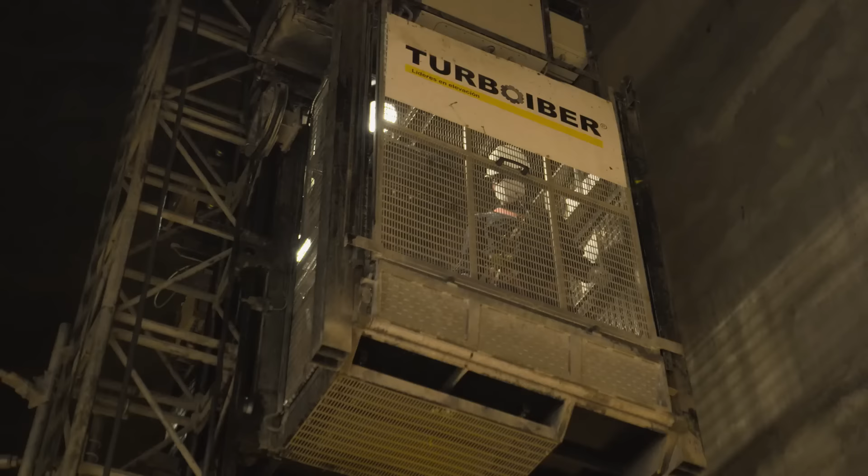Here we are on top of the tower, 220 meters up, and here you see all the solar field with 10,600 mirrors, which aim the light of the sun to the top of the receiver, increasing the temperature to 560 degrees Celsius.

A global industrial revolution is underway. We have a technological challenge for our environment, for the well-being of the population of the planet, for civilization.

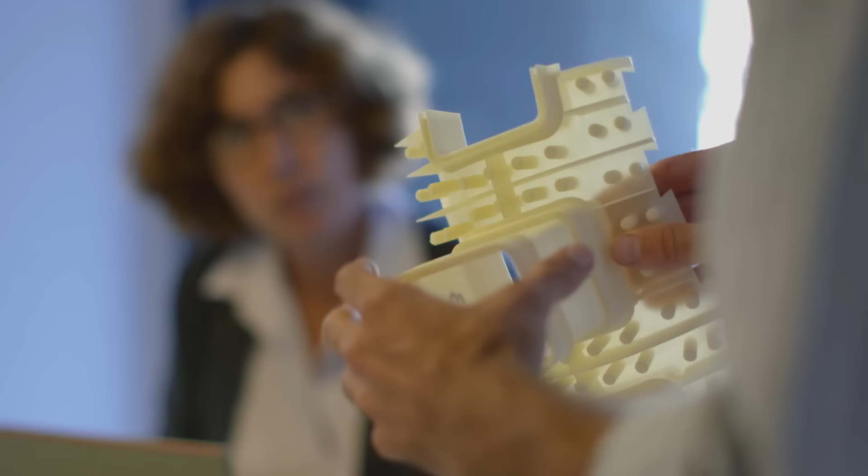Driven by passionate, dedicated individuals intent on shaping a new world. I do it because I look at my kids, and I honestly am convinced that this is the way.

A cleaner world. There is a way forward other than burning fossil fuels out of our funnels. A greener world. This wind farm is producing more hours of power into the grid than all wind farms in the UK, and probably in the world.

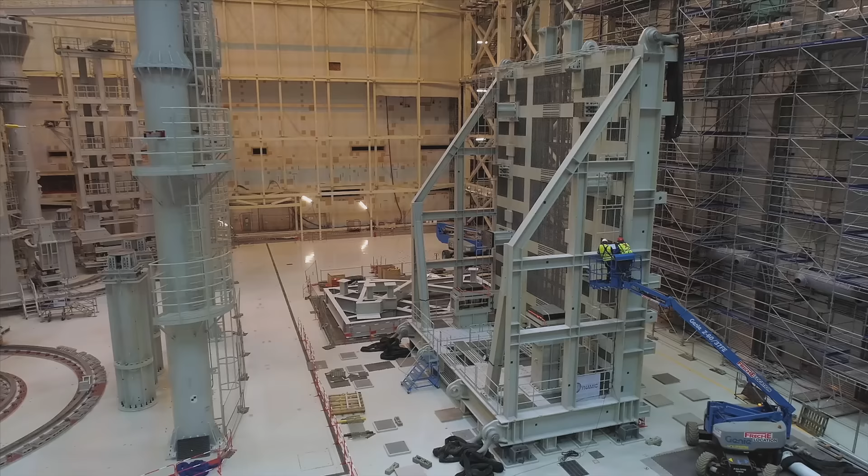What we've done in the past is not going to solve these challenges. We need to find new ways, and I think the only way to do that is to bravely step forward and implement technology. Together, they are pushing engineering to its limits to create extraordinary machines that can protect our planet for the future.

We face one of the greatest challenges in the history of humanity: to eliminate the fuels that have driven progress and technology for over a century, while our thirst for energy only grows.

Could the solution lie with an ancient and distant power source? It's without question that in our solar system, the sun is the greatest source of energy, and the better we can take advantage of that, the better it is for us as a civilization.

It's like a nuclear reactor in the sky, and it provides endless power. If we can harvest just fractions of this, it can power all our consumption.

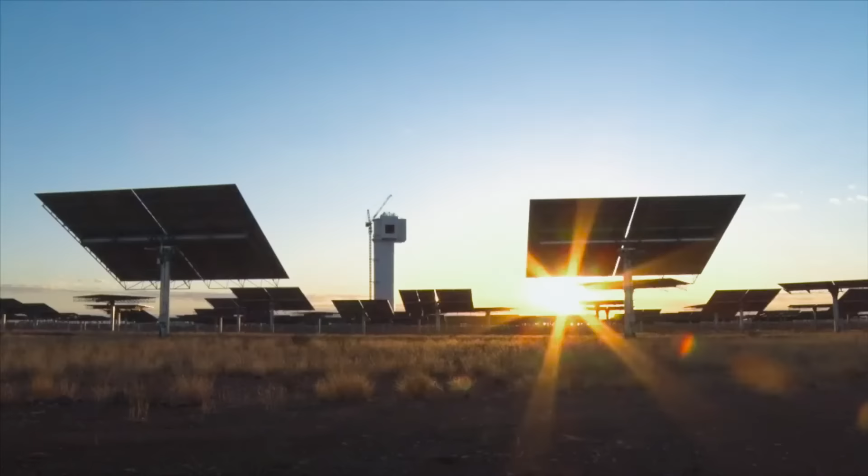Giant strides have been made in capturing the sun's energy, but to replace fossil fuels, solar power needs to step up a gear. We've got a long way to go.

The way I see it, we've only got 2% of the world's energy from solar. So there's a massive opportunity there, and this technology is made for it.

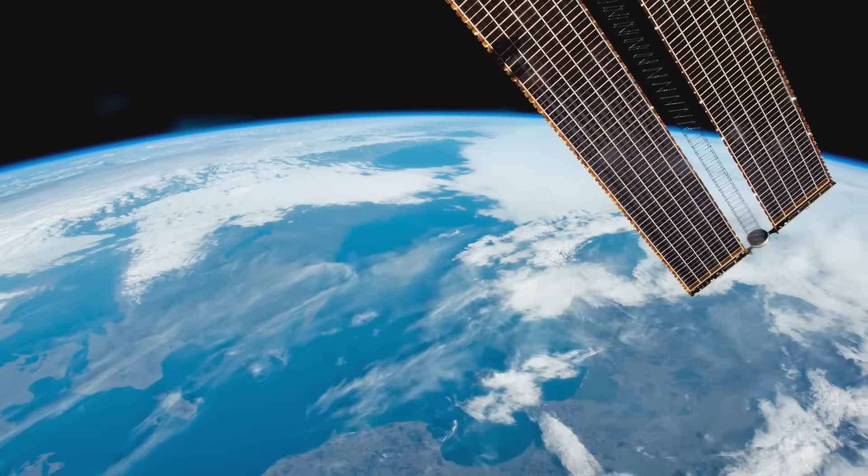Engineers are racing to capture more of the sun's power, to open vast new expanses for solar panels, and even to make solar electricity available through the night. This is the full cycle that allows us to keep generation going 24 hours using 100% renewable energy, the light from the sun.

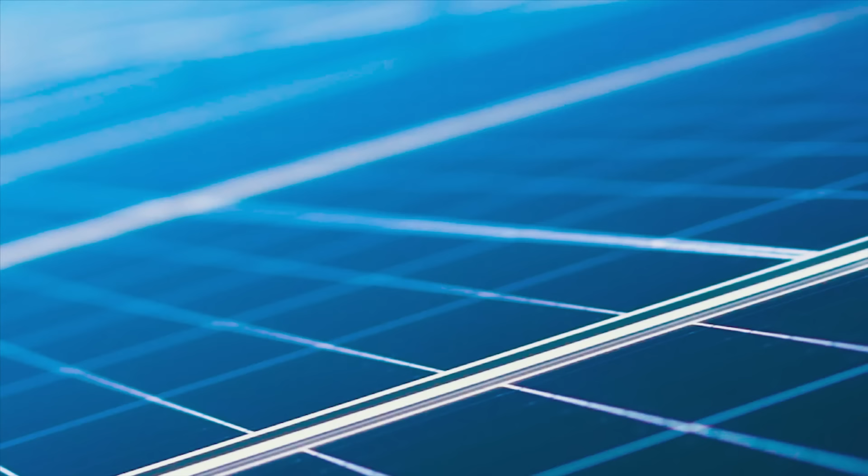The vast majority of solar power today is generated by silicon solar panels. These are made of many individual cells. Each cell has two thin layers of crystalline silicon, which have been altered so that one is slightly negatively charged while the other is positive.

The magic happens when light falls on it. Electrons in the silicon atoms absorb the energy and break free. The negatively charged electrons are then drawn towards the positive layer. Once connected to a circuit, this flow of electrons becomes electricity.

Solar panels like this are on rooftops all over the world, producing clean, green electricity to power our homes and charge our gadgets.

But transportation is a much tougher challenge. It's still overwhelmingly powered by fossil fuels.

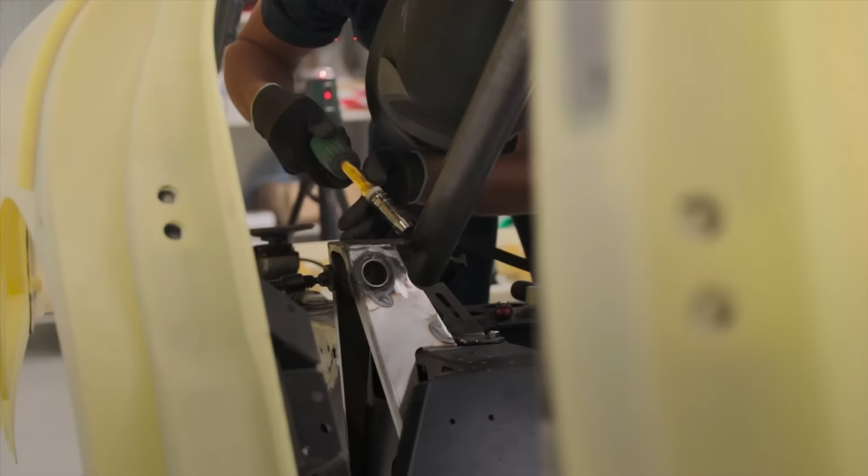A tech startup in Holland has gone right back to the drawing board, inventing a new car from first principles that could revolutionize personal travel. Their goal is to prevent billions of people buying gas-powered cars by offering them a vehicle that charges itself for free.

Everybody said we couldn't do it, and that's what makes it interesting. So I think that's actually one of the things that motivates us, that it seems like an impossible challenge. And if we look back at the beginning, it all started with the World Solar Challenge.

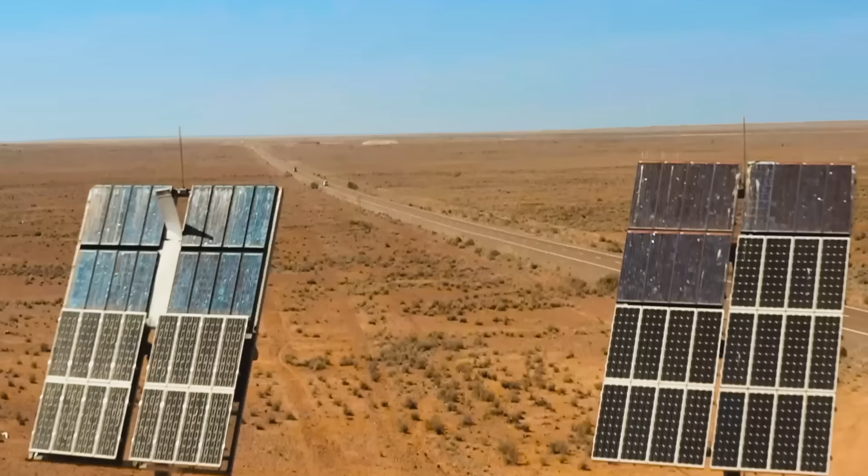Their story began at a race across Australia. Every two years, a fleet of futuristic vehicles can be seen streaking across the desert. This 1,800-mile race is powered by the sun, with cars built by students from around the world.

In 2012, a Dutch team from Eindhoven, including electrical engineering student Arjo van der Ham, decided to enter for the first time. I think most people were there for the adventure, for actually building something with your own hands during your studies, seeing it work, and then trying to win the race in Australia.

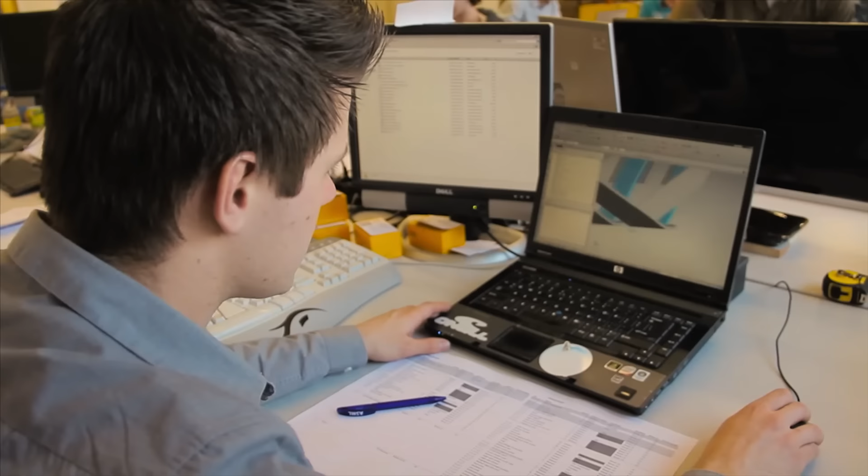In previous years, all entries had been one-seaters, built purely for speed. But that year, the team decided to enter a new category that awarded extra points for comfort and practicality. The idea was to encourage the development of a commercially viable solar-powered car.

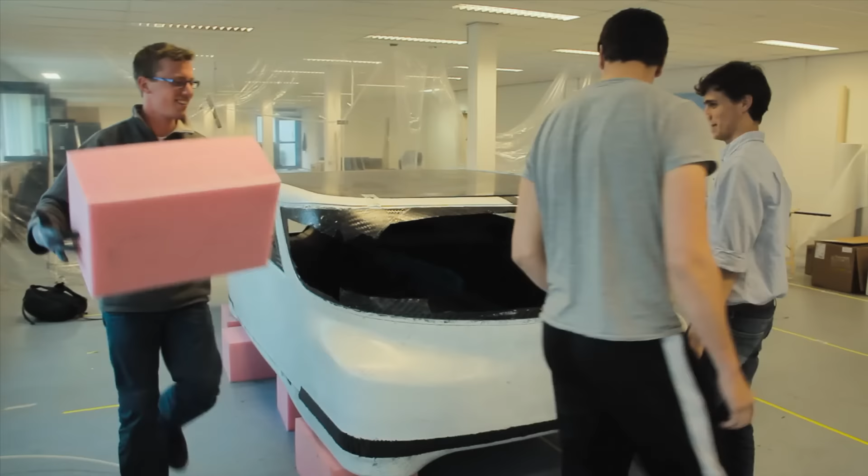We said, okay, let's build a four-seater car. And that became Stella, the world's first solar-powered family car. It had a flat roof, especially for the efficiency of the solar panels. Furthermore, it was very aerodynamic and very lightweight, made almost completely out of carbon fiber.

The team had just over a year to fully design and build a radical new solar car that could also be a practical family vehicle for everyday use. Stella, they hoped, would be the blueprint for the car of the future.

People would be sleeping at the university, waking up, building the solar car, going back to sleep for 6 hours, then waking up to build again. It was really an intense period for most of the people on the team.

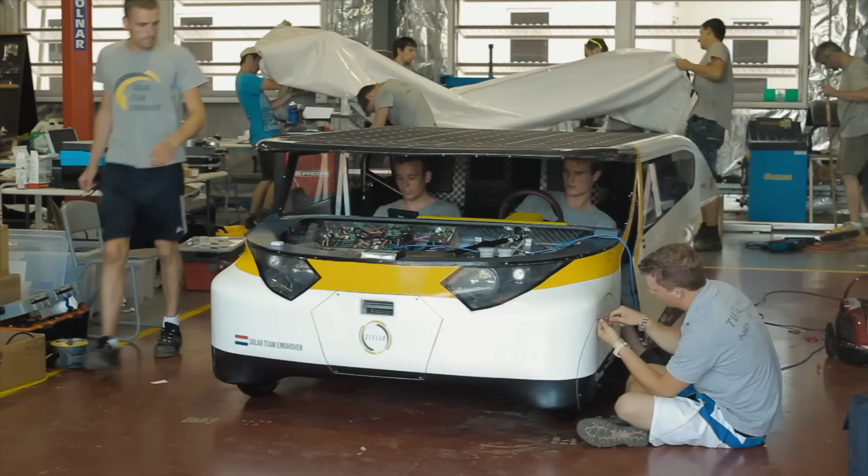On the 6th of October 2013, the only family-sized car in the race crossed the starting line in Darwin, Australia. For the next 6 days, Stella would be racing through the desert, powered by the sun.

During the race we had the solar car, and in front of that a small van called the strategy van, packed with computers. There were two of us, me and my buddy, modeling and calculating exactly how fast we should drive so that at the end of the day our battery would be exactly empty.

Everyone expected the comfortable four-seater to be much slower than the others. But by day 3, she'd hit 75 miles per hour, so fast the team bus couldn't keep up.

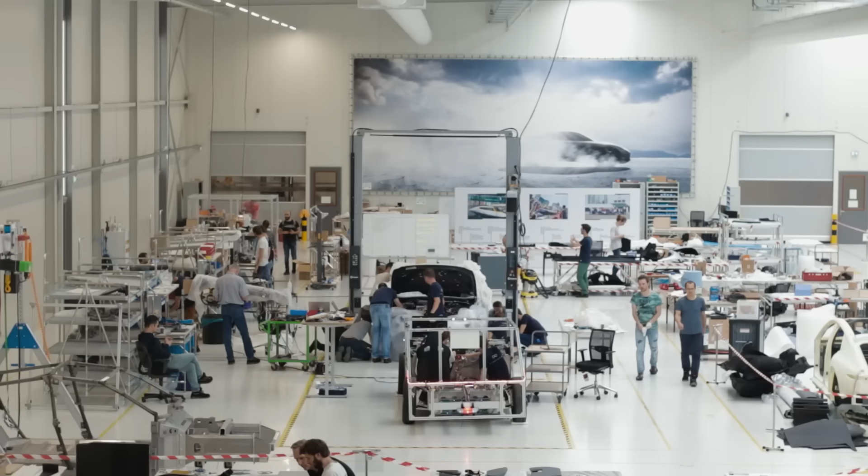Arjo and four other team members decided to make the dream a reality and launched Lightyear to make solar-powered cars for the public. In one year, the entire fleet of cars throughout the world will drive one light year worth of kilometers. The mission of the company is to get that to one light year of sustainable kilometers by 2035.

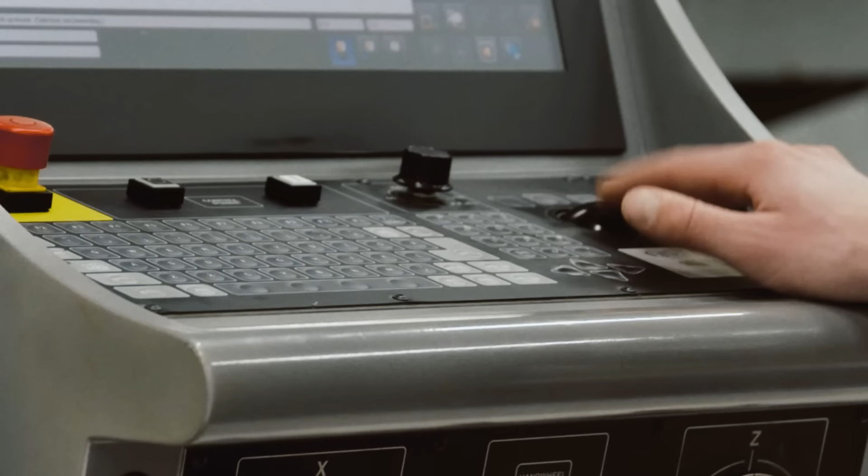To achieve their mission, they set about turning Stella's outlandish design into something more attractive to consumers, while still keeping the radical approach. We came up with our own scoring formula for what would make this car better. The key metric we optimized the Lightyear 1 for is the amount of miles you can drive each year on the sun - the miles you can drive for free. That guided all the decisions. So if you have to decide whether the car should be wider to accommodate more solar panels, or smaller to make it more aerodynamic, you calculate how many solar kilometers option one would give versus option two, and then make your decision. This is what guided the development of the Lightyear 1.

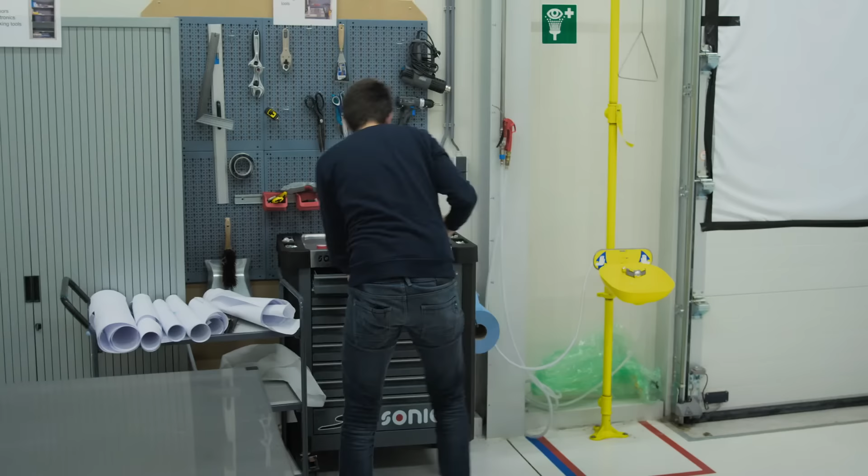As Chief Technical Officer, Arjo has overseen the design of the solar panels. At their workshop in the Netherlands, Lightyear are fixing them in place. With panels on the roof and the bonnet, they cover 54 square feet in total. But although they work in the same way as a standard panel, Arjo has altered the structure to maximize the power. A special technique can reveal the design.

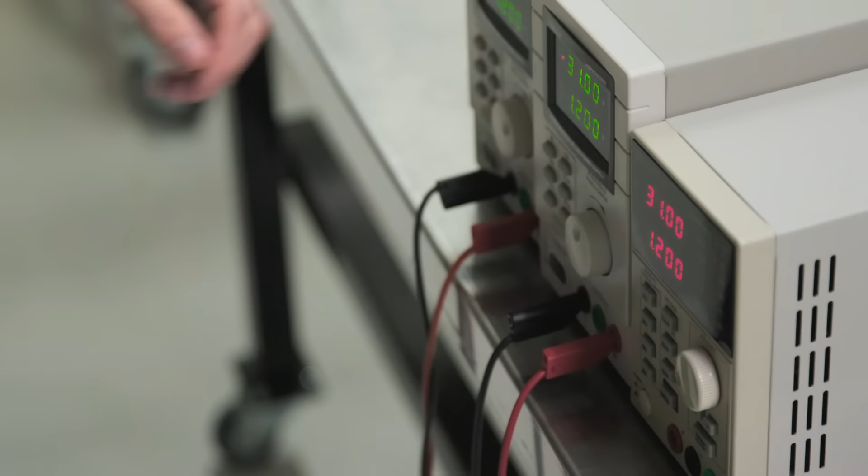We can actually show the structure of the panels and any defects they have using an EL test. With an EL test, you use the solar panel in reverse - normally the solar panel turns sunlight into electricity, but if you do it the other way around and provide electricity to the panel, it will work as a light source, lighting up in the infrared spectrum. Now we make it dark in the room, turn off the lights, and take a picture with a camera modified to show up the IR light. Then we can see the groups lighting up.

You see all of the cells lighting up, but there's a couple of exceptions. This is actually an old panel that we used already for a lot of tests and abused quite a bit, so those are also the places where the solar cells themselves don't work anymore.

Like an X-ray, as well as showing what's broken, the image reveals the inner structure. To increase the power output of the solar panel, we've done lots of small tricks, like putting all the solar cells pretty close to the edge. We've cut them to a smaller size, so we can place them closer together. Lightyear claim these are the most efficient solar panels on any car, with the improvements gaining them 20% more power.

As well as squeezing more solar cells into every square foot, Ayo has divided them into groups. To see the benefit of that, you need sunlight. Luckily for countries like Holland, the panels even work on a cloudy day.

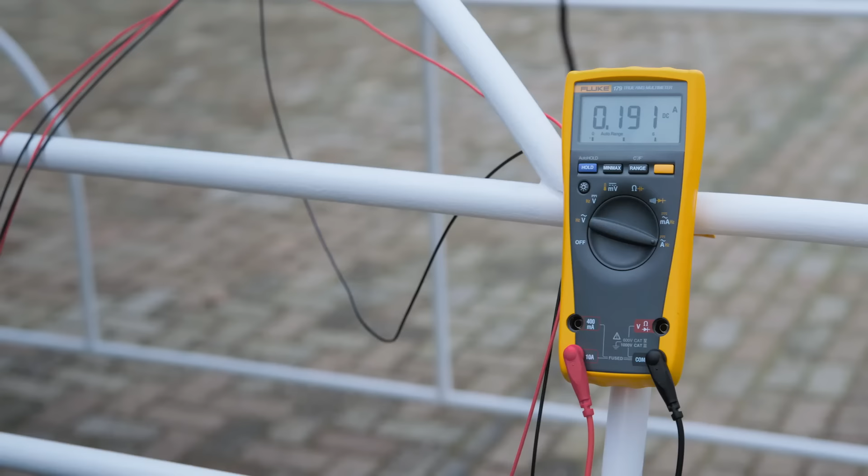First, Ayo connects this regular solar panel to a voltmeter. This will reveal what impact shadows can have on the power they produce. We've connected the panel to the meter, and if I put a shadow on it, you'll see this number dropping - and it doesn't matter where I put the shadow, you lose the same amount of energy. If a shadow falls on even one solar cell, the power generated by every other cell drops by the same amount, even if they're in sunlight, because they're all connected.

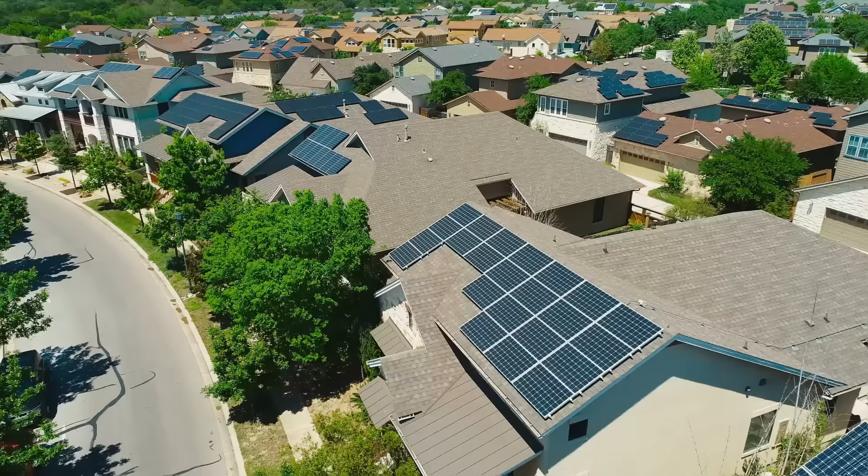So the whole panel becomes much less efficient. This doesn't matter much for panels on rooftops that rarely have shadows fall on them, but cars regularly drive under trees or past buildings. On this panel, we've actually divided it into 11 very small panels. These 11 small panels mean that if one of them is in the shade, it will only shut down that one small group and not the entire panel.

We can actually demonstrate this. If I go over it with this board, I create a shadow on the front, and only the first meter shows that it drops - the other meters still show the same value. If I move it along, the value on the first meter comes back, and it drops on the second meter. Moving further along, the same thing happens on the third meter. So as I go over the different groups, I only shut down the performance of that group, not the entire roof, which you would see on a regular panel.

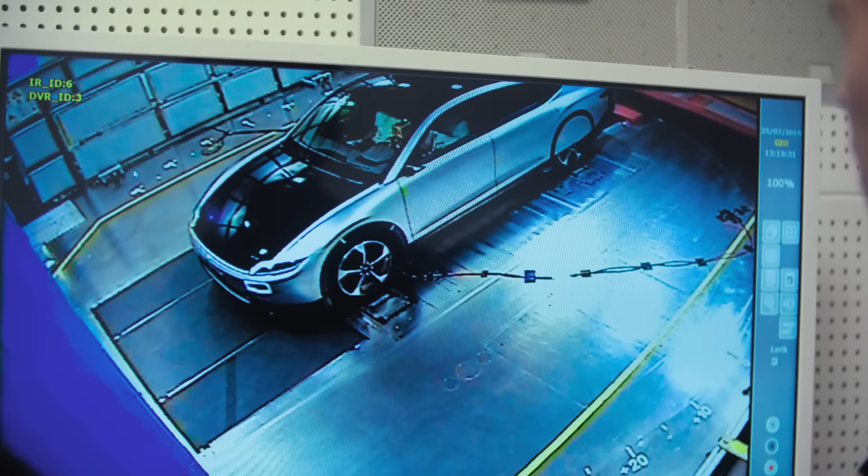As if reinventing the solar panel wasn't enough, the Lightyear team have an even bigger engineering goal: making the car one of the most efficient ever produced. The Lightyear 1 is designed to maximize the amount of miles you can drive each year on the sun. And if you break that down, the biggest factor is aerodynamics, so making the car more aerodynamic is where you can save the most on energy consumption.

Most of the design process happens using computer simulations. But now the team must prove how streamlined the car really is.

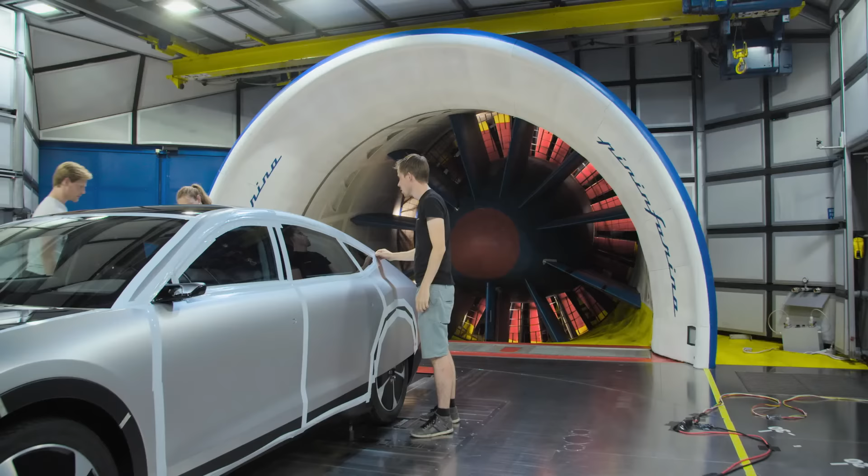Annemiek Koers is responsible for Lightyear 1's aerodynamics. We are currently in the wind tunnel with the prototype of Lightyear 1 to test how it performs at different speeds. So we test the airflow over the car, how much drag it produces, and what effect that has on the range of the car.

The tests will reveal the drag coefficient, a number that tells you how much wind resistance the car has. The target is to get down to about 0.2, which would equal the most streamlined production car ever made. With such low drag, it could drive much further with the precious solar energy it collects.

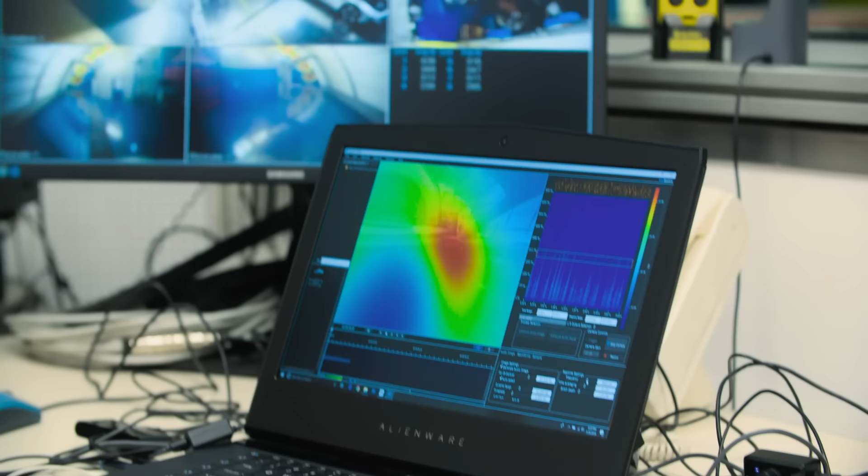But compared to a regular car, the team face an extra challenge. As well as being streamlined, the shape must also fit enough panels. The aerodynamics are a bit constrained by the solar roof. It needs to be quite a flat surface on top instead of having very curved surfaces, which would be better for aerodynamics. But the team have managed to find a profile that boosts both solar power and efficiency.

One that gives a larger area for the panels while also reducing drag. You can see we have a very shallow slope going to the rear, and the flow can stay attached over that full length. If you have a shorter car, you get a steeper slope, and that will detach the flow and create a lot of drag.

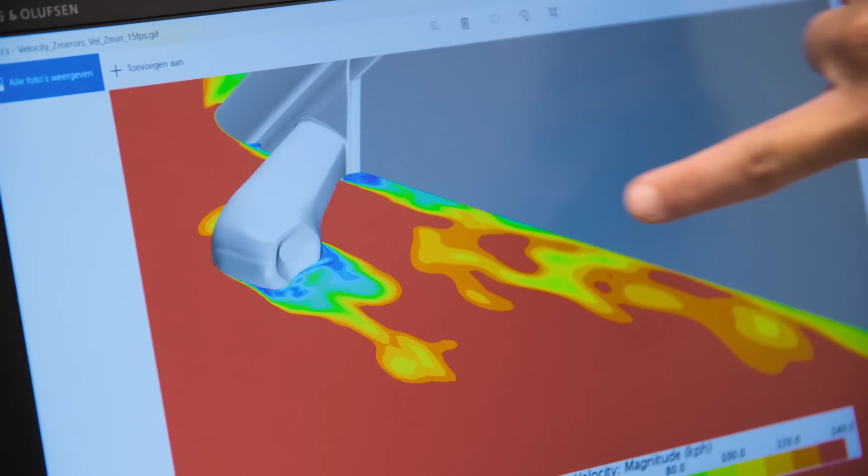The team analyzed and modified every inch of the car, replacing bulky wing mirrors with streamlined cameras and fixing covers over the back wheels.

Eventually, the team get the drag coefficient down even further than they'd hoped, below 0.2. So we can claim to be the most efficient production car by the time we get to production, but that's of course the first step.

This world-beating efficiency means the solar energy can go much further, even in cool, cloudy countries. The solar panel will actually give you enough energy to drive somewhere around 8,000 kilometers per year in the Netherlands. It doesn't sound like that much, right? But the average car in the Netherlands actually drives only 11,000.

For California, they drive much more, but there's also much more sunlight, so you get again around 70% of your annual energy need from the solar panel. For the other 30%, the Lightyear 1 can be plugged in and charged like a regular electric car.

For now, to pre-order one will set you back well over $100,000. But it could also save thousands at the pump. Towards the future, we will be developing an affordable version of the Lightyear 1, and we see energy efficiency as the key to the price in the longer term.

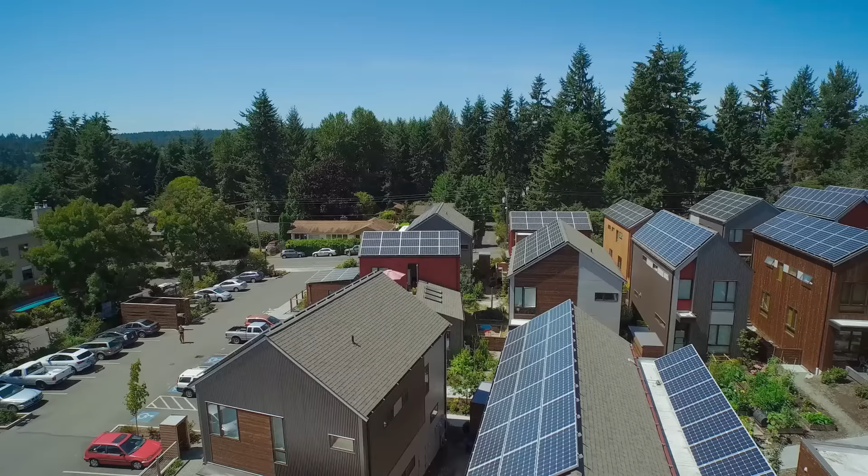But while solar cars may still have a premium price tag, the cost of standard solar panels has already plummeted. The main mineral used to make solar panels, quartz, is abundant and cheap. And by mass manufacturing in large factories with automated production lines, they also cost less to make.

Solar power now is the most affordable source of power. It's just a matter of capturing this energy. Solar power now beats coal-fired power and diesel generators, and hundreds of millions of solar panels are manufactured every year.

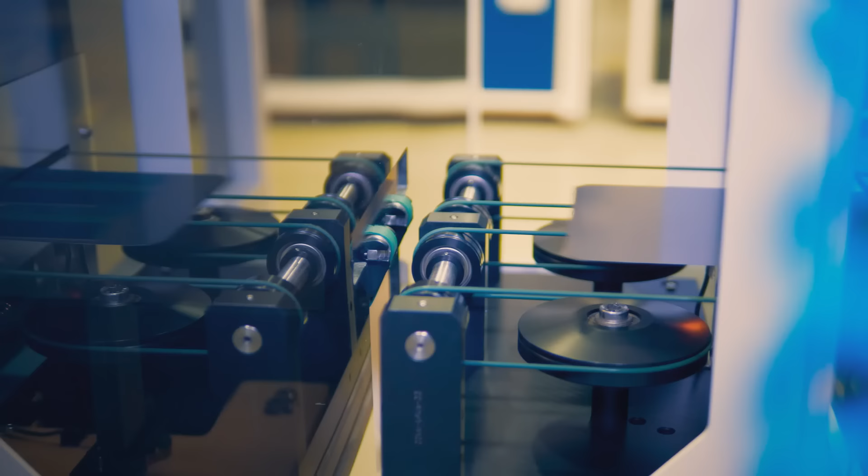With such cheap panels available, solar farms have mushroomed. Many are so large they're visible from space. Some generate over 2 gigawatts of electricity, enough to charge 400 million phones at the same time. And yet solar power still produces only 2% of the world's electricity.

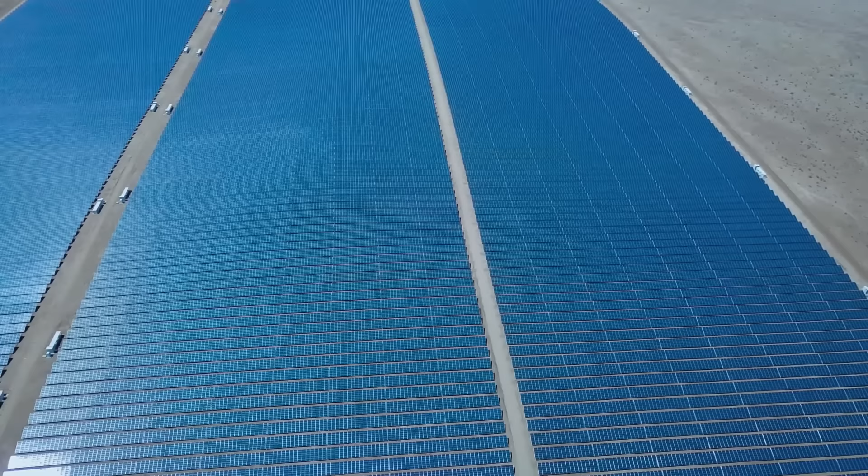That's because although panels are cheap, they need the right kind of location. So one of the challenges, and this is now starting to happen with the very high number of solar panels, is we are searching for new places to put them. And it's a quest to find these areas in good positions.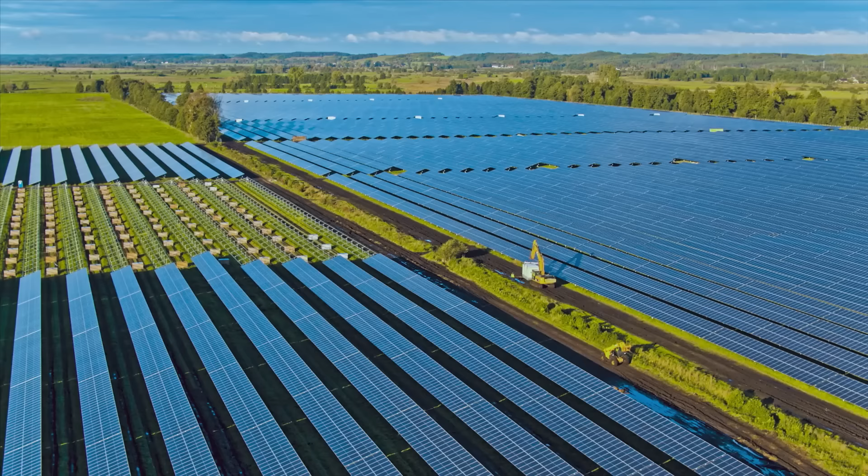As solar farms get bigger, they start to compete with other uses for the land, such as recreation, farming, forests, and other wildlife habitats. It's questionable whether to set aside big surfaces for solar farms, and it's becoming more and more difficult to find good spots for at least very large solar plants.

To solve this conundrum, an entirely different approach is starting to make waves. Børge Bjørneklett is the founder of Ocean Sun, a company making platforms for solar panels that float. Børge realized that there are water bodies all over the world with readily available sunlit surfaces.

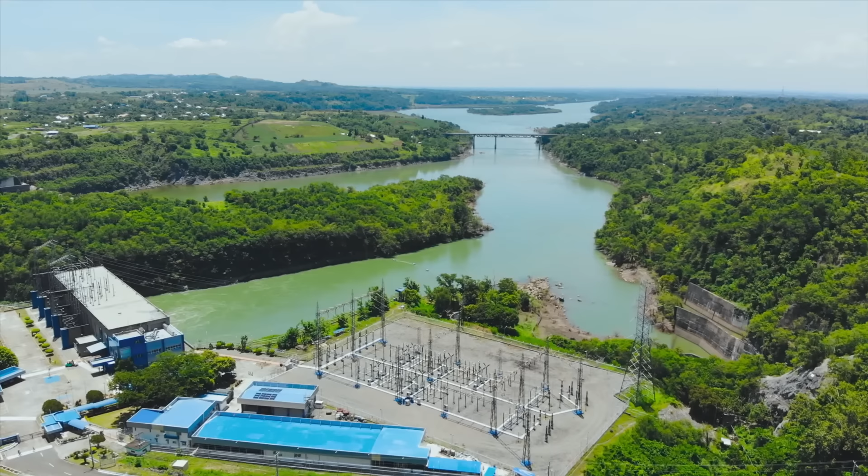Many, like the Magat Reservoir in the Philippines, are next to hydropower dams, which has a big benefit. One very nice thing about combining floating solar power and hydroelectric power is the very short distance from producing solar power to delivering it out to the grid, because the infrastructure is already in place at the power station.

The solar panels generate electricity when it's sunny, while the dam makes power when it rains. It has the flexibility over the seasons—for the rainy season and the dry seasons, you can make a more steady power production. So this combination is a fantastic application.

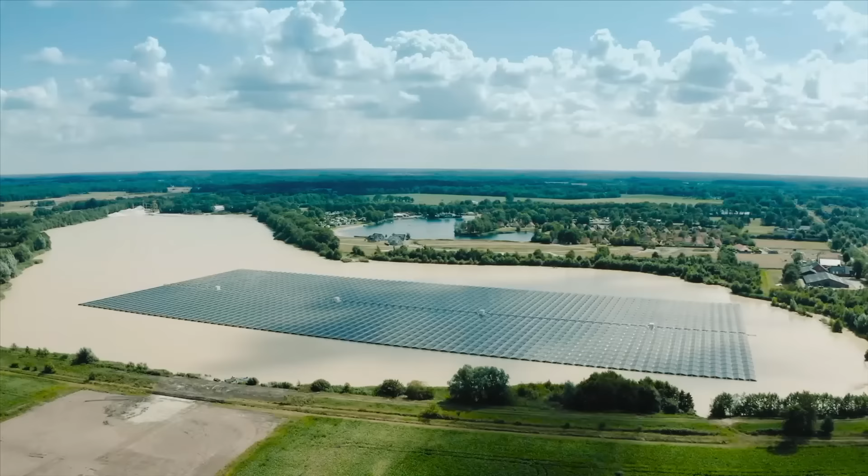Other companies are also targeting lakes and reservoirs. But Børge has set his sights on a much bigger body of water: the sea.

The main obstacle is the ocean waves. The challenge is very much to create a protective environment for these solar panels, and also to cope with waves and strong winds that can occur on water surfaces. Ocean Sun tested their design off Norway's coast.

The most critical piece of engineering that protects the panels is also the simplest: the thin polyethylene membrane that forms the surface. This is the fabric of our system, which we place the solar panels on top of. As you can see, it's less than 1 millimeter thick.

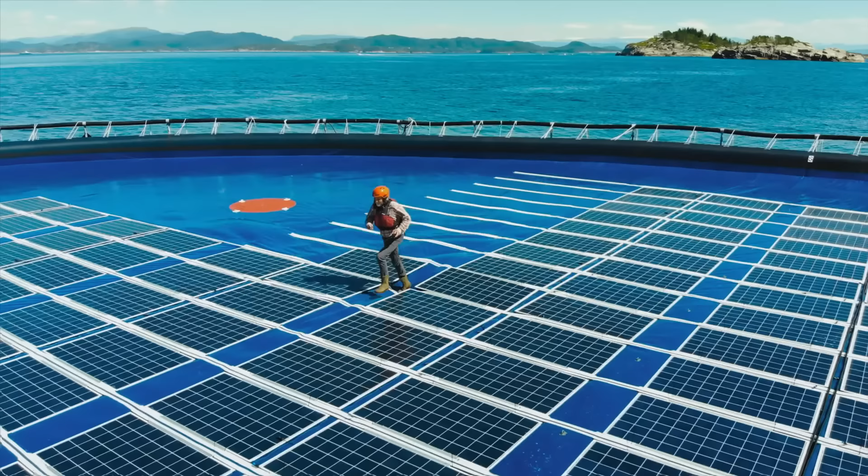It interacts with the surface tension of the water to create two curious and powerful effects. Firstly, it boosts the strength of the material. This fantastic effect that this layer has when we put it on top came to us as a big surprise—that you could actually walk around on the water surface through this very thin fabric.

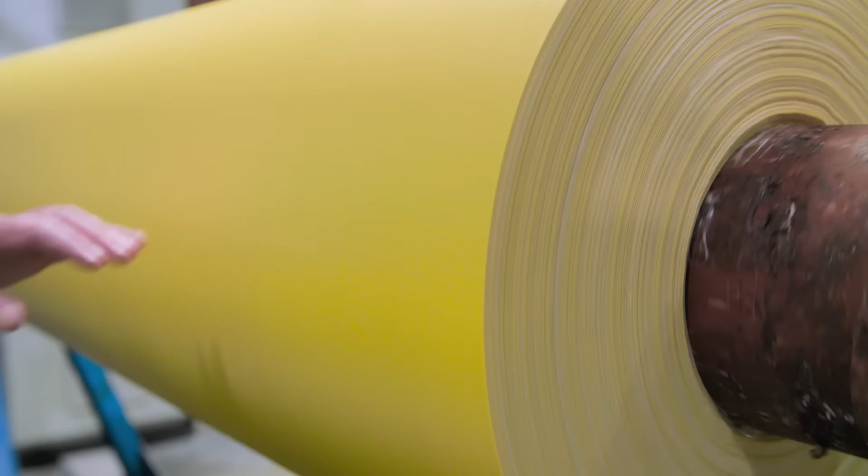Secondly, Børge discovered that the membrane changes how water behaves. It has a dampening effect on the motion of the waves, and it serves as an ideal surface for placing solar power on top of it.

In January 2019, the floating system had a chance to prove itself. In the winter, we had a pretty bad storm coming in over Norway. Bridges were closed and the ferries stopped, and we really got to test our system in quite bad conditions.

The floating solar array was hit by high winds and waves. Once the storm had blown over, the panels emerged unscathed and still generating power.

Having proved it can survive harsh ocean conditions, sea-based solar seems perfectly placed for an energy revolution, as nearly half the world's population lives near the coast. Many big cities, like here in Oslo, have the ocean right on their doorstep. And if we can use the surfaces here for floating solar power, you have a very short transmission to the consumers.

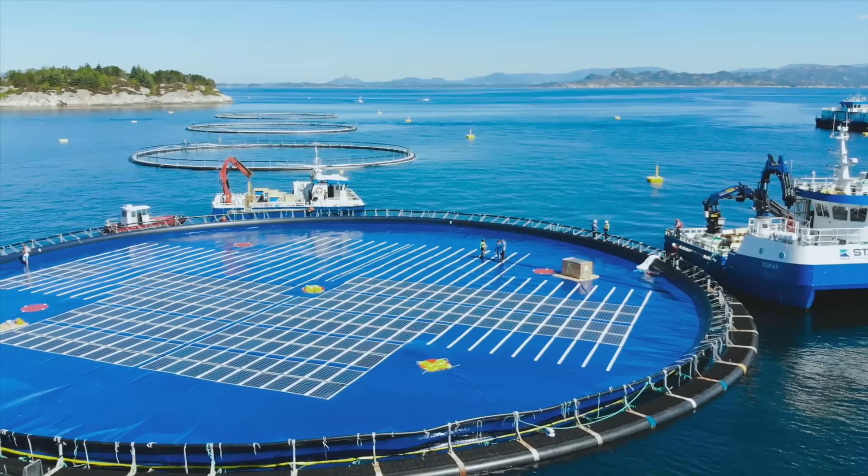Research is underway to minimize any negative impact on marine life. So far, results have shown that floating panels appear to reduce damaging algae blooms.

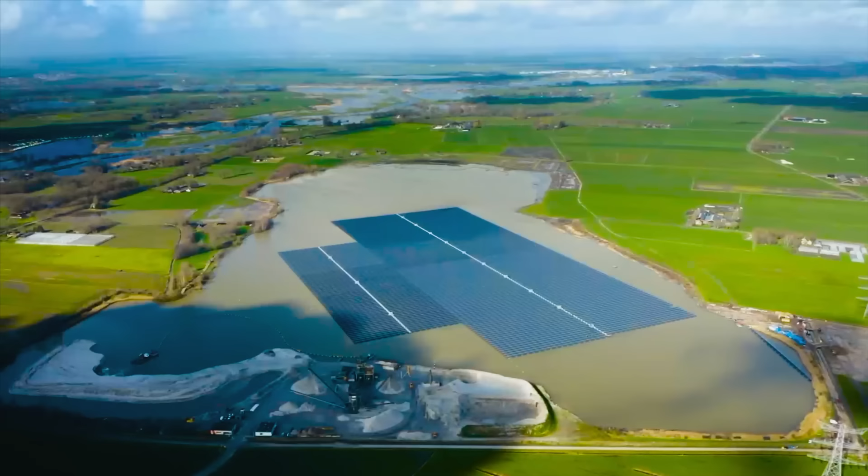With water surfaces now available as well as land, experts estimate that 70,000 new solar panels are being laid every hour, equivalent to 1,000 soccer fields a day. But although solar is already the world's fastest growing energy technology, it could be generating even more power.

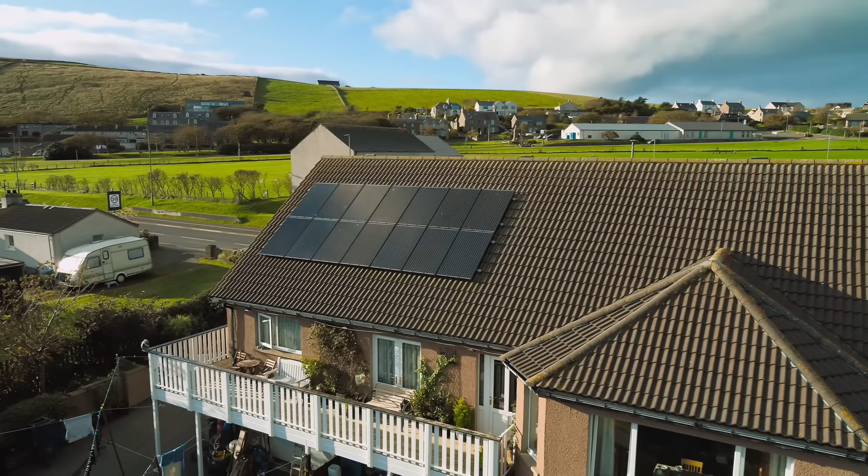Standard solar cells can only convert about one fifth of the energy available in sunlight into electricity. The fundamental problem with your standard solar panel is it captures a little bit for electricity—15 to 20%—and throws the rest away. If that percentage were increased, we could accelerate the transition to clean energy sources.

In Victoria, Australia, a company called RayGen thinks they have found a way to harness more of the sun's power.

Inventor John Lasich came up with part of the solution as a student way back in 1975. I was pretty ambitious for a young lad, and I thought if you're going to make perhaps a quarter or even half of the world's energy from solar energy, you have to have something that is highly efficient and very, very powerful. In the 1970s, solar panels were small and even less efficient than they are today.

But John had a simple idea how to supercharge them. He calculated that a parabolic dish with a reflective surface could focus sunlight onto one small solar cell, concentrating the power of the sun like a magnifying glass. So he had a parabola-shaped bowl made for him in pottery class and then ingeniously lined it with a reflective bag from a box of wine.

I put those two items together and produced a solar concentrator. We produced several hundred times more power out of that cell. And at that moment, I knew we're onto something.

To overcome this, John developed a way to protect the cells from overheating, a system he still uses today. Normally, we'd expose these to 750 suns of intensity, and what we have to do is have a module that is tough enough it can stand a blowtorch. It's the equivalent of 750 suns of intensity.

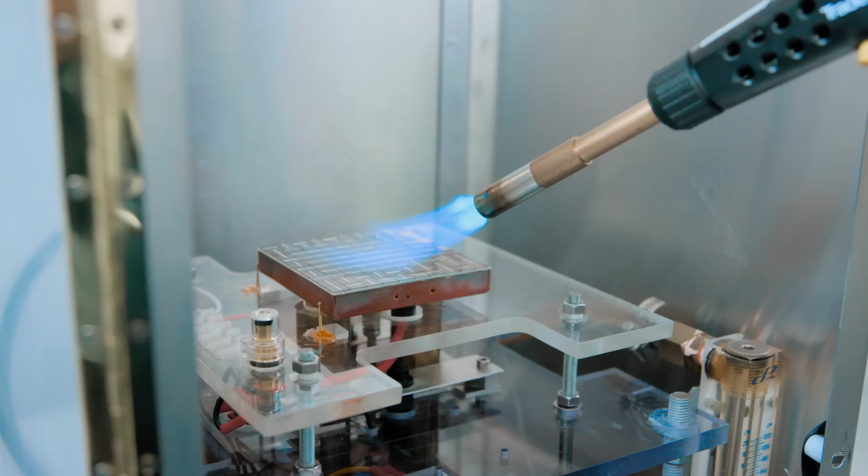The apparatus keeps the solar module cool even when blasted with heat intense enough to melt steel. The secret system involves pumping high-pressure water through the back of the panel. Stone cold. That shows how effective the cooling is, and it's stone cold.

With the heat problem solved, John scaled up his idea into bigger and bigger dishes. Eventually, he found a system that could focus even more sunlight. At RayGen's pilot plant in Bendigo, Victoria, instead of focusing sunlight with a parabolic dish, they used giant mirrors. These reflect sunlight onto solar modules at the top of 3 tall towers.

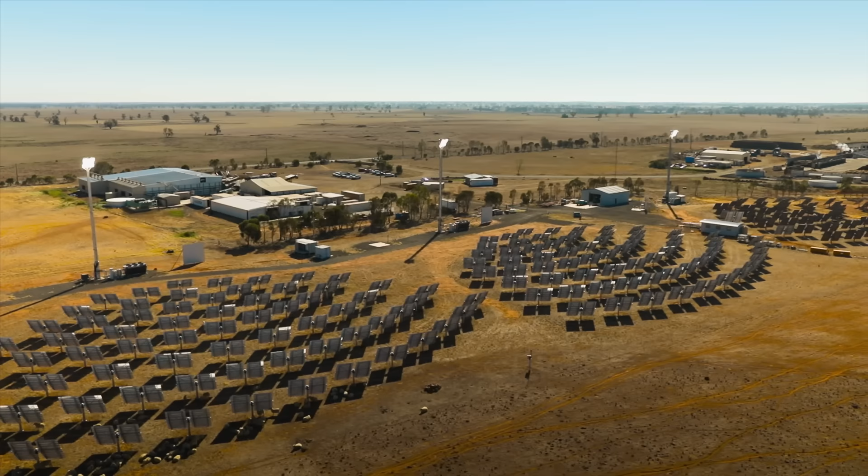What we do is we put an array of these modules into a large receiver that has a field of mirrors that focus a massive beam of light to that receiver, where we can produce megawatts of electricity out of that array of modules. The receivers are exposed to 750 times more sunlight than they would be on their own.

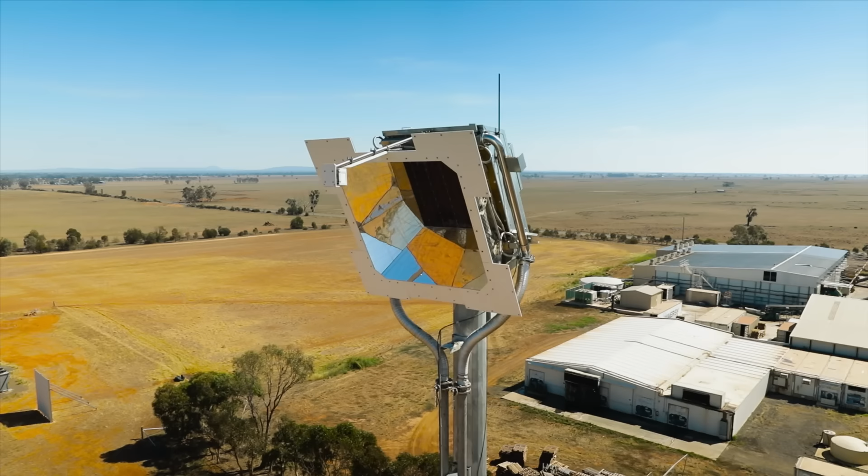And this allows another major technological advance. Their solar modules consist not of normal solar cells, which turn around 20% of sunlight into electricity, but of a special type called multi-junction cells, which produce far more power.

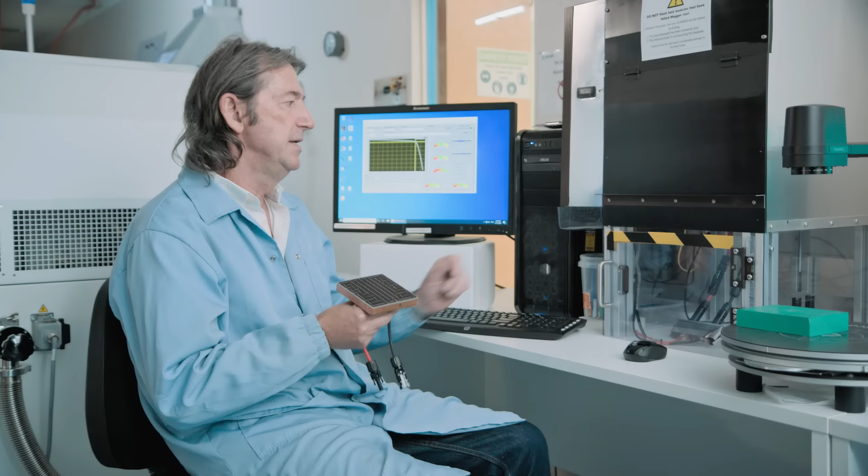This is the flash test that we're about to demonstrate, and this measures the power and the performance of the module. So we take a module and we place it into the chamber. This machine simulates the sun. We have a flash gun at the top, which provides the highly intense light. We simply run the process, and the machine collects the vital information about the module. So the main indicators being the power at 2.27 kilowatts, the efficiency of an astonishing 36.9%.

Multi-junction cells can turn around 40% of the sun's energy to electricity, nearly double what conventional ones achieve. This is because sunshine consists of many different wavelengths or colors of light. Standard solar cells have one pair of silicon layers, which can only absorb a small range of those wavelengths. The rest is wasted. Multi-junction cells, on the other hand, have several pairs of layers, each made of different materials that can absorb different wavelengths. So more of the sun's power is harvested.

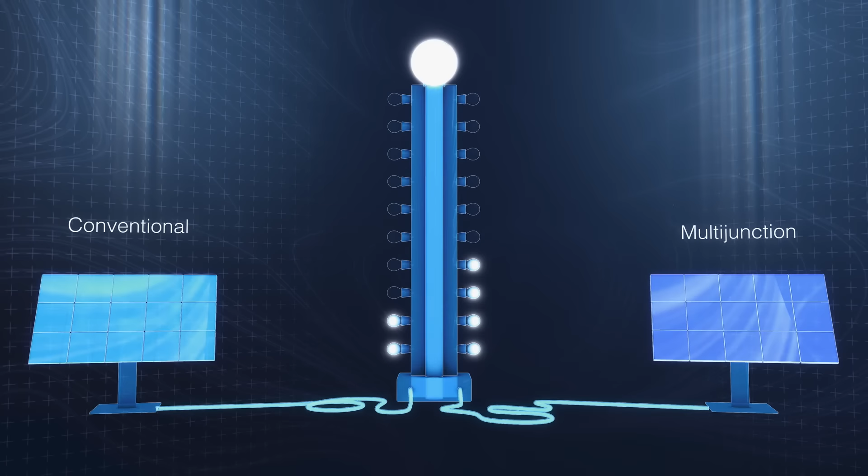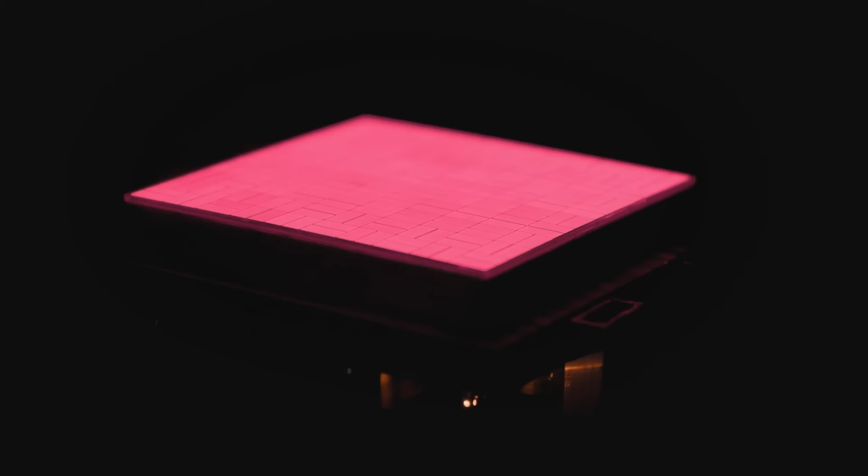Although multi-junction cells are around twice as efficient, their price is also higher. So they're normally only used to power specialist equipment like space satellites. But by concentrating the sunshine, RayGen only need a small number to capture a vast amount of light. The trick that we have is, yes, we pay 100 times more per square centimetre for the cell, but we get 1,500 times more power out of the cell in our system.

When the sun is focused on them, just 2 of these can produce as much electricity as 20 full-size solar panels covering the roof of a large house.

John has plans to scale up his pilot plant to produce gigawatts of power. And they can even share the land it's on with others. What we can do is spread the collectors out a little bit, which makes the system very efficient, but it allows the grass to grow, and we can actually run stock at the same time. So you've got a solar farm and you've got an agricultural farm running on the same land. The beauty of a light footprint.

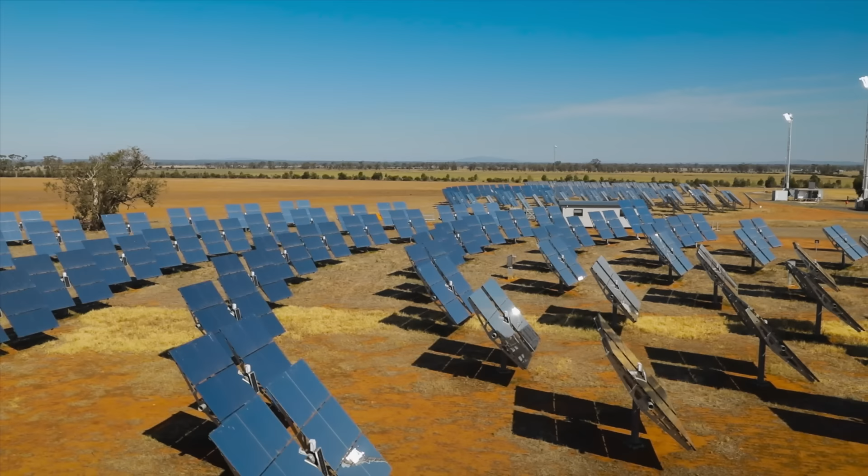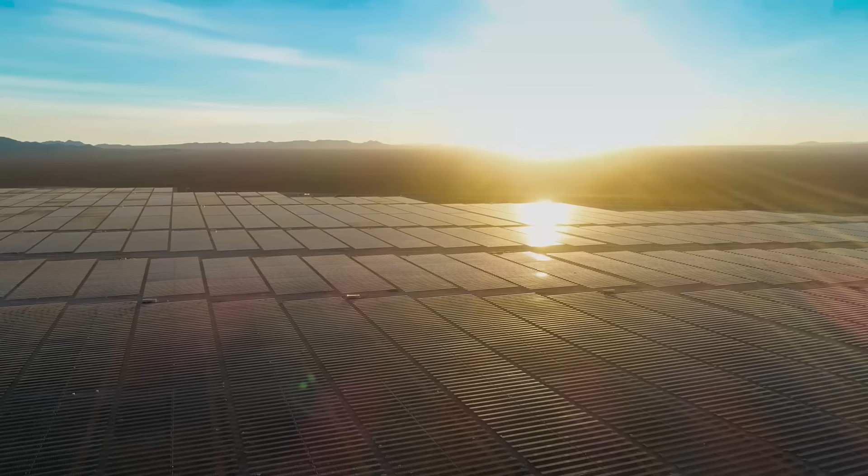RayGen hope to disrupt the industry with their radical approach, harnessing even more of the plentiful power we receive from the sun. But despite its success, solar energy currently has a major drawback: demand for power surges in the evening, just as the sun is setting. Unlike fossil fuel power stations, most solar farms can only produce electricity when the sun is shining.

In the arid Atacama Desert in Chile, a major new development is aimed at solving the dilemma: Cerro Dominador. Like the RayGen plant in Australia, Cerro Dominador has a tower surrounded by mirrors that will track the sun and collect its energy. But the system works in a fundamentally different way and on a far bigger scale.

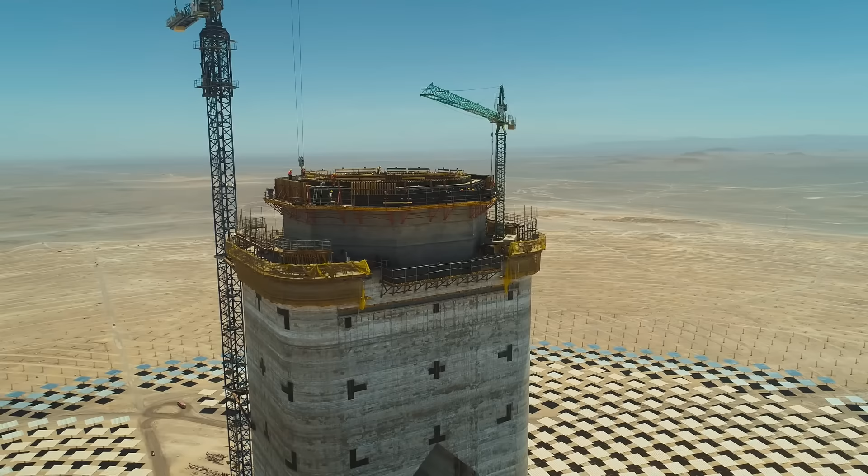Once complete, the tower will rise as high as a 70-story skyscraper. Francisco Vizcaíno is project director of this groundbreaking venture. It is very important to develop projects like this, because if we really want to turn the page on fossil fuels, we need to create green energy, renewable energy that is able to work 24 hours, in the night.

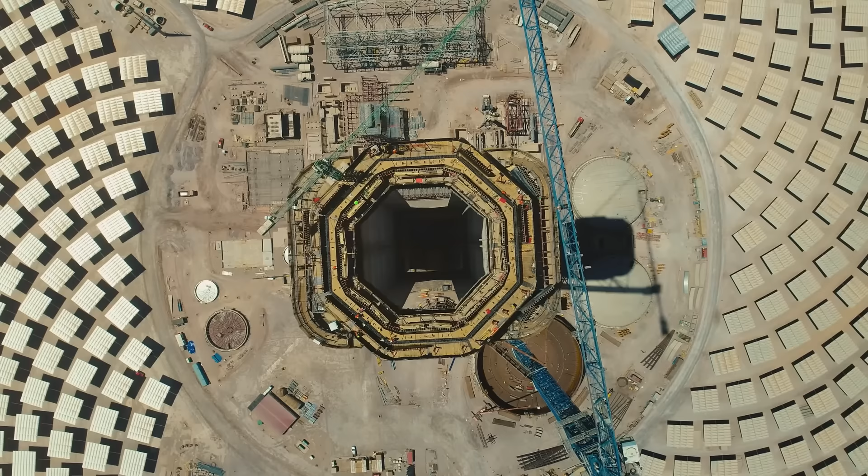One of the most challenging things in constructing this kind of plant in the desert, with this big tower, is the earthquakes. The seismic movements, we need to control by doing a special design and special engineering and special construction. For the 820-foot high tower to be quake-proof, its foundations must be 24 feet deep.

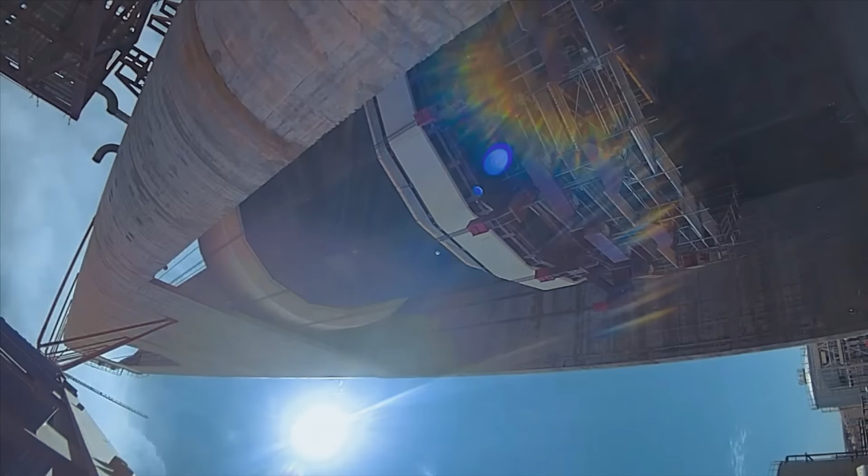Once the main structure was complete, an enormous receiver was assembled for the top. This is where the sunlight will be reflected onto. But the 72-hour-long procedure to lift it into place had never been attempted before.

Lifting up this equipment was one of the biggest engineering and construction maneuvers in South America of all time. It was one of the most tense moments in our life in construction. We have been lifting the receiver, taking care of the earthquakes and the wind, and it was a very, very difficult maneuver.

Lifting 3,000 tons of equipment from the ground 250 meters to the top of the tower was challenging, was difficult, but was very nice.

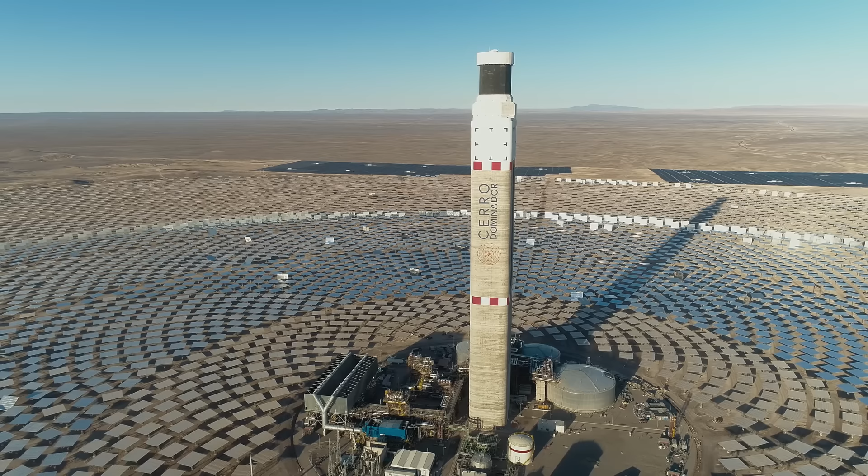The receiver, which weighs as much as a Navy frigate, was lifted by 16 powerful hydraulic jacks. For safety, it had to be moved no faster than 16 feet per hour. After 3 days, the receiver reached the top and was successfully fixed in place. Once complete, the tower became the second tallest man-made structure in Chile and the 5th highest on the continent.

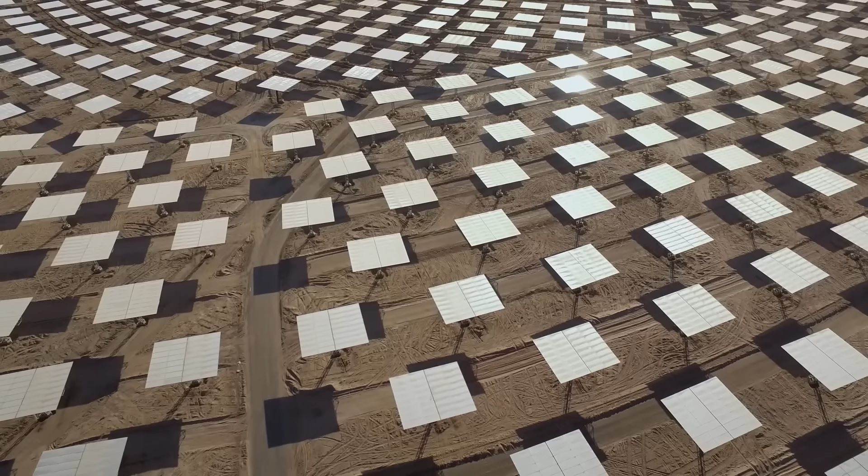As well as building the giant tower, the workers have a huge job assembling and calibrating over 10,000 giant mechanical mirrors called heliostats, spread over an area of 1,700 acres. Each one is the size of a helipad and can tilt in any direction.

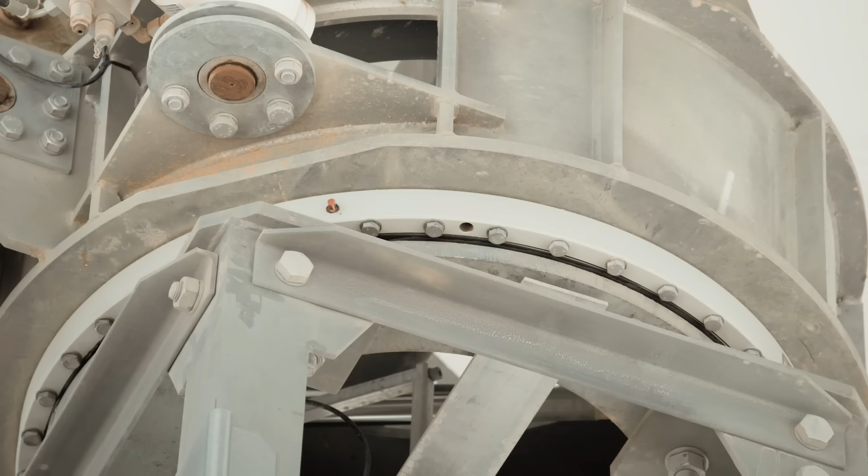But as the sun moves through the sky, the heliostats must also move to keep the reflected sunbeam trained on exactly the right spot. If they're even a fraction of a degree out of position, the whole system could fail.

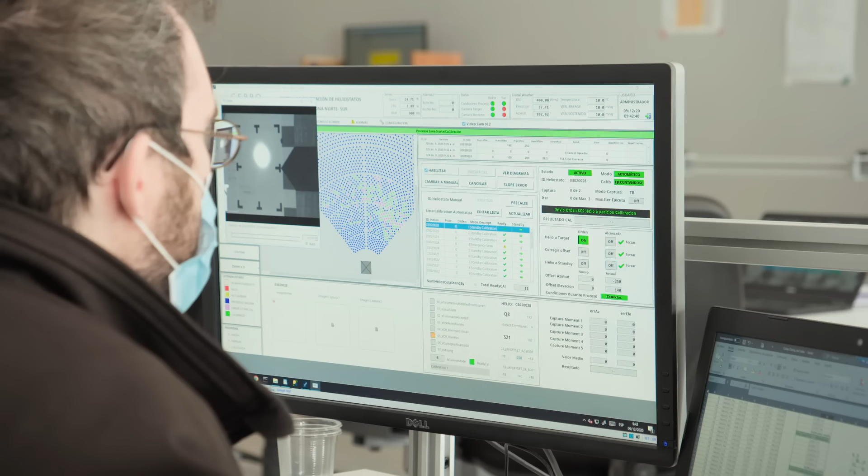For each heliostat to be able to automatically track the sun, the team must first train the reflected beam of light onto a target on the tower.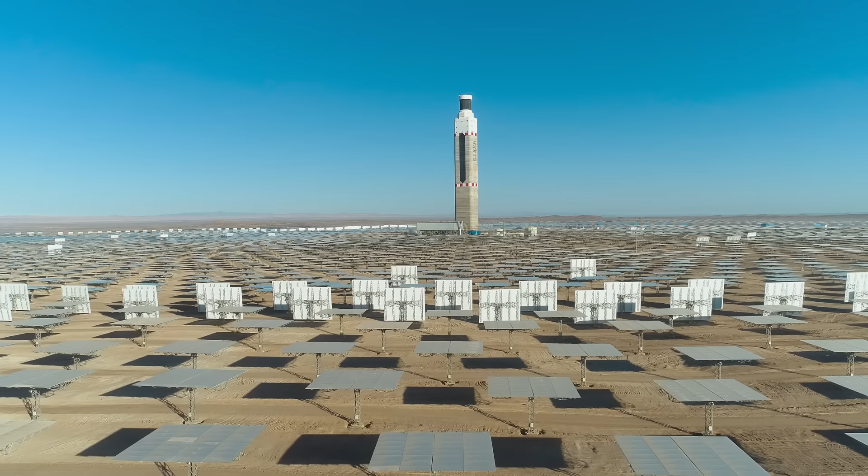It's very, very nice when in the morning they wake up and, like sunflowers, they are following the sun, aiming the light of the sun to the top of the receiver.

From here, you can see the big difference between this site and conventional solar power plants. There are no solar panels anywhere. At Cerro Dominador, they will generate electricity a completely different way.

A special liquid made from salt is pumped to the receiver at the top of the tower. Here, the reflected heat from the sun raises the liquid's temperature to a whopping 1040 degrees Fahrenheit, as hot as lava.

That molten salt is then pumped back down the tower, where it's used to heat water and make high-pressure steam. That steam drives a turbine and makes electricity.

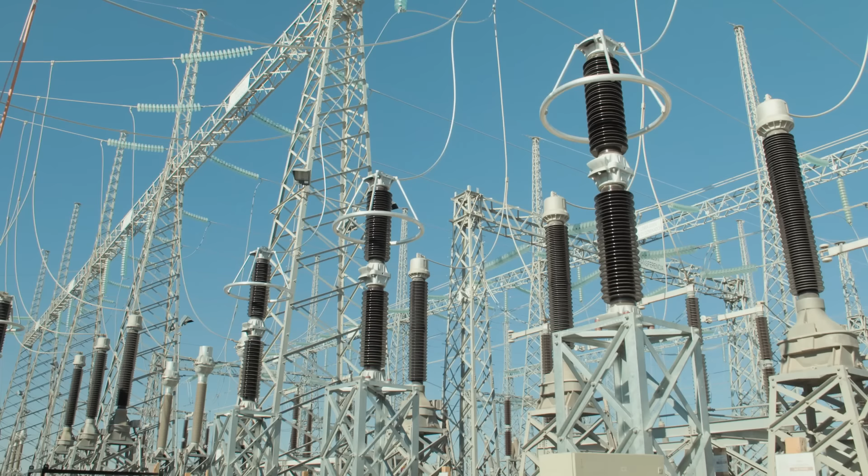Cerro Dominador is not the first solar plant to generate electricity this way, but it aims to be one of the first to produce power reliably on demand 24 hours a day.

Conventional batteries are much too expensive to use on this scale. So to generate electricity through the night, Cerro Dominador has 2 giant storage tanks at the bottom of the tower.

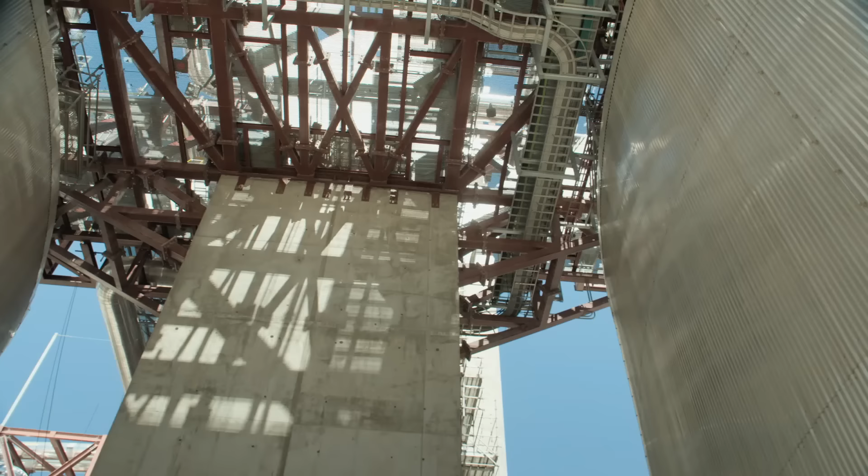Here we have the tanks. The salt today is here, melted. 46,000 tons of salt inside those tanks waiting to be pumped to the top of the tower.

The salt from a nearby mine in northern Chile consists of sodium and potassium nitrates, which have the ideal properties to store heat safely and reliably.

Once on site, the salt was melted. Then the liquid was stored in a tank. Despite being 600 degrees Fahrenheit, this is known as the cold tank.

In the morning, we have all the salt there in the cold tank, 46,000 tons of salt there. During the day, the salt is being pumped to the top of the receiver, to the top of the tower.

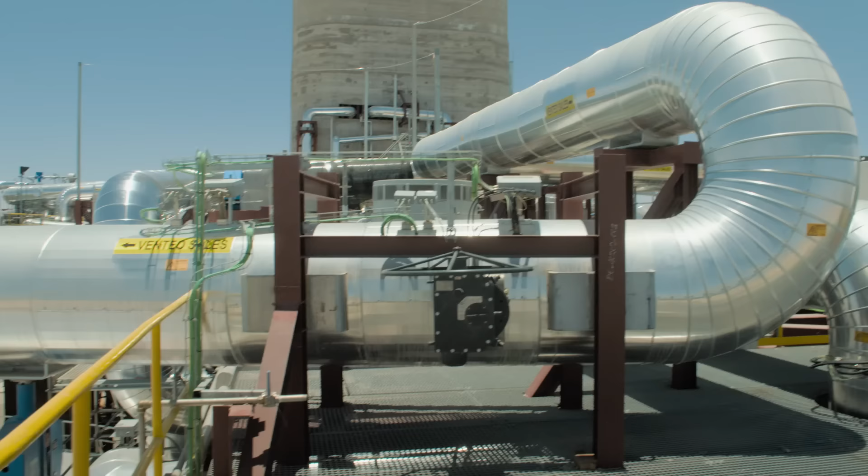In the receiver, we heat the salt, and we start to fill the hot tank. So during the day, the cold tank is getting empty, and the hot tank is getting full. In the hot tank, the salt is stored at 1040 degrees Fahrenheit.

The tanks are so well insulated that the temperature only drops 1 degree per day. During the full night, we are using that salt to generate steam, and at the end of the night, again we have the cold tank completely full of salt. This is the full battery cycle that allows us to keep generating 24 hours using 100% renewable energy, the light from the sun.

Solar tower technology with molten salt tanks can generate solar electricity on demand 24/7. But they only work efficiently in countries with intense sunlight near the equator. If power from the sun is to truly replace fossil fuels, we need solar-generated electricity available day and night, everywhere.

A team at the US Naval Research Laboratory is working on a way to supply solar power to any place, any time.

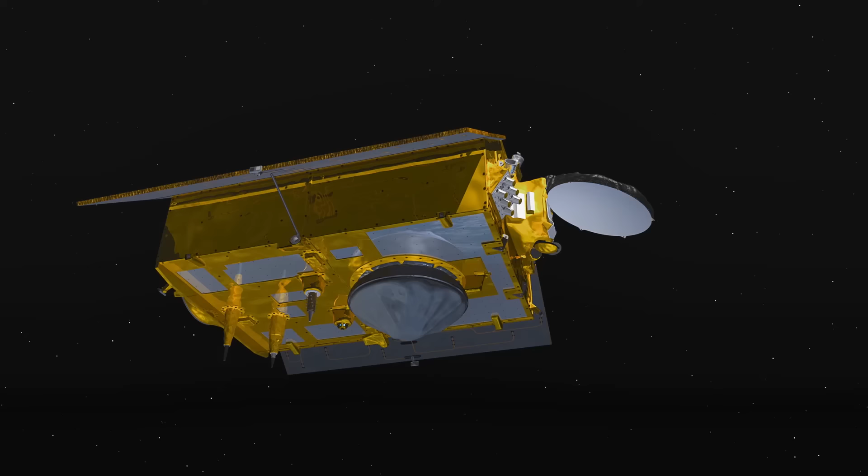It's called space solar, and it sounds like something from a science fiction movie. The idea of space solar is that instead of collecting sunlight on the ground using a solar panel the way we usually do it, we take that solar panel instead and put it in space and then send it to where you need it on Earth.

We kind of take it for granted now that we can go anywhere on this planet, take out your phone, and it tells you where you are. And we can do that because we have a system of satellites, the Global Positioning Satellites, which was also created here at the Naval Research Laboratory.

And we're talking about doing the same thing for energy. Imagine if you could just go anywhere on Earth and you wouldn't have to worry about charging your batteries or where you're going to plug in, and just have energy no matter where you are.

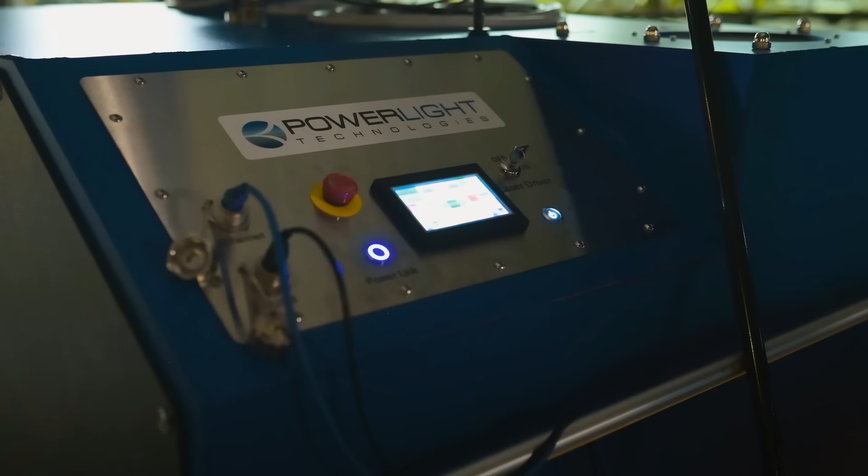Dr. Paul Jaffe is the lead engineer on the project. In 2019, his team set out to demonstrate a vital part of the technology at one of the world's biggest marine testing facilities: a prototype system to transfer power over long distances without using wires.

Instead, the power will be sent as a laser beam. So we have here today a 2 kilowatt laser transmitter, and we have a receiver that is made out of photovoltaics, similar to what you would find in a solar panel. This is really a remarkable capability that unlocks all kinds of amazing possibilities.

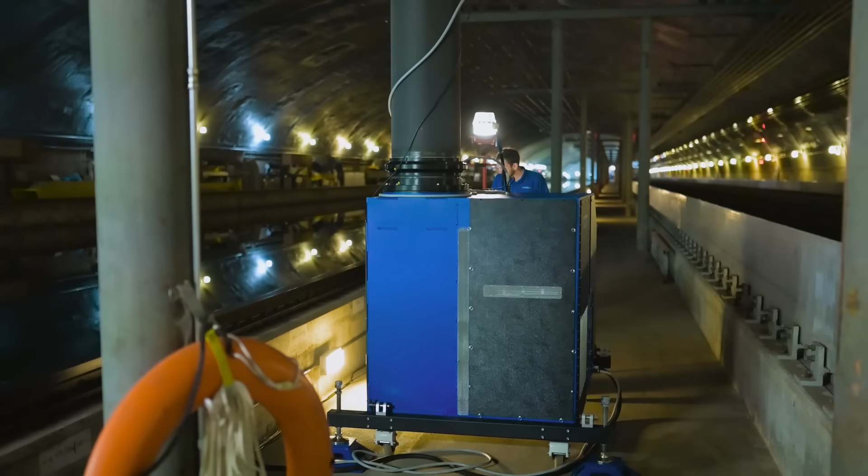So the power beam itself is invisible and completely silent. The way that we can help show where it is with this $20,000 infrared imager. You can see the transmitter sending the beam over 325 meters to the receiver at this end of the basin, which converts that back to electricity for us to use. You'll notice, though, that you cannot see the beam if you just look without an imager.

The aim is to ultimately use a scaled-up version to send beams of solar energy collected in space back to Earth. The transmitter would be on a satellite, with the receiver down on the Earth's surface. Imagine if we could take the boundless sunlight in space and send it effectively to the ground, to wherever we need it—whether it's a refugee camp, a developing country, places that are difficult and expensive to get energy to today. If we could do that effectively, it would be truly revolutionary.

But firing a giant laser beam at Earth from space might naturally cause alarm. So Paul's team have developed a safety mechanism and are testing it out today. The system should detect when something or someone enters the beam and instantly shut down.

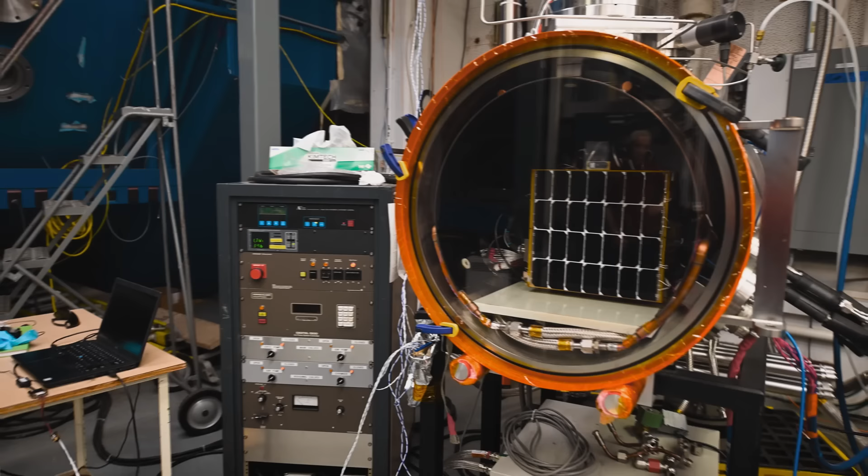As well as creating safe power beams, Paul's team have been working for 10 years on a prototype space solar module called PRAM. Its job is to generate solar power and convert it to a form of energy that could be beamed to Earth. To check that the module would work outside the atmosphere, the team simulated space inside the lab: liquid nitrogen matched the extreme cold, a vacuum chamber removed the air, while xenon lamps mimicked the intense sunlight.

But although space conditions are harsh, there's more energy available to harness. In space, it's always daytime and it's always brighter than anywhere on Earth. So you not only have 24-hour-a-day sunlight, but it is also brighter. You never have to worry about clouds, nighttime, rain, or anything that would interfere with the collection of solar energy. The next step was space itself.

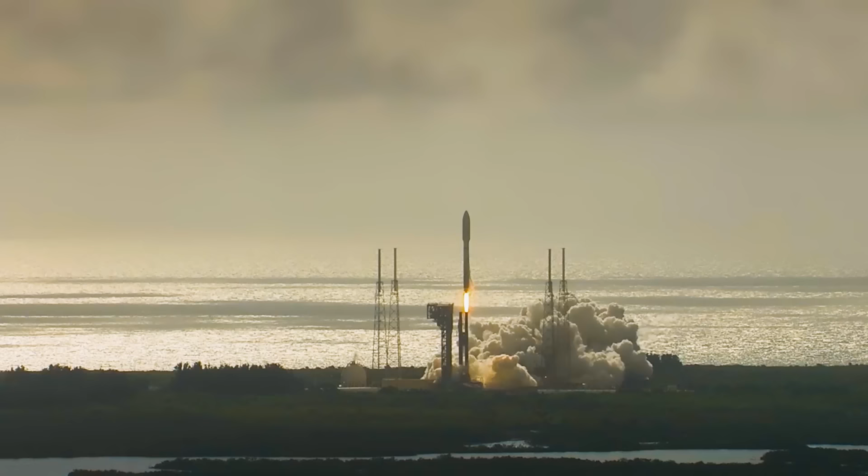T-minus 3, 2, 1, and liftoff. After more than a decade's work, in May 2020, the module launched aboard the US Air Force X-37B orbital test vehicle.

It almost felt surreal to think of how it started as just a kind of crazy idea that we proposed, and got the funding, resources and support to build, and finally made it to a point where we're actually launching it into space and it's operating on orbit and sending us data that we're now going to use to continue to push this technology forward.

Paul's team are laying the groundwork for a potential energy revolution in years to come. In the meantime, other solar technologies are already powering ahead.

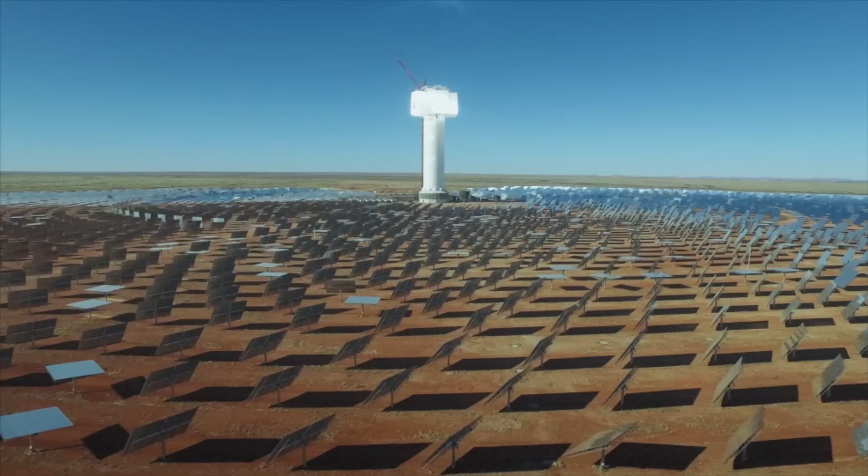Solar towers capable of generating electricity 24 hours a day are appearing in sunny countries around the world, from Israel to South Africa, while advances in technology capture more and more of the sun's energy. In Australia...

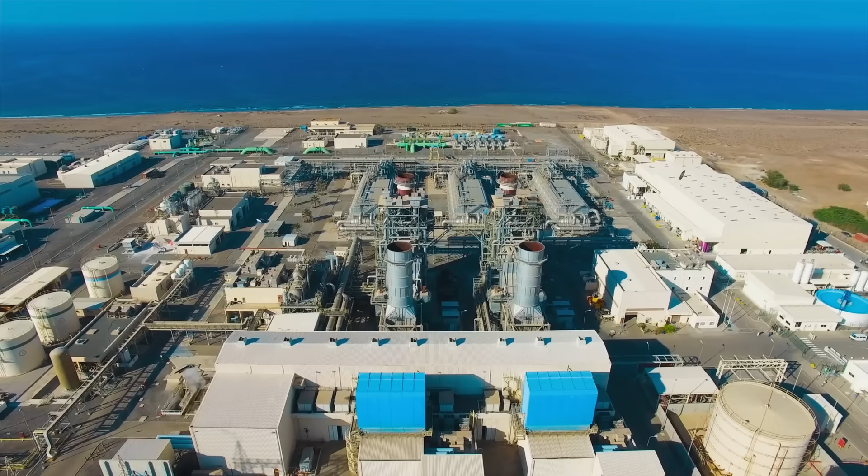RayGen plan to start harnessing the heat from their cooling system to produce another critical resource alongside electricity. That byproduct heat can be used to desalinate water very cheaply, producing the two most important resources that any community needs: power and water. With power and water, you can do anything.

Lightyear have plans for a car that's so cheap to run that billions of drivers would choose solar-powered transportation. That became the mission of the company: clean mobility for everyone. That's what we're working towards—first by making, unfortunately, a rather expensive car to test the technology and show everybody that this is working, and then the next step is to make it available to everyone to fulfill the mission.

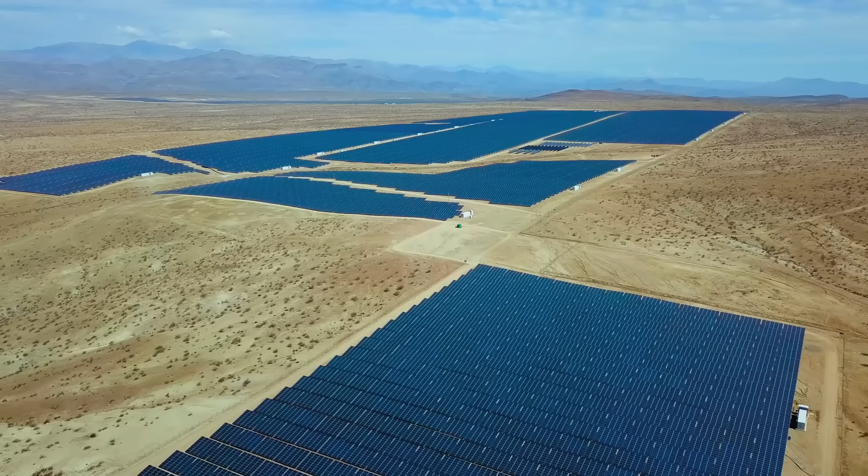The spread of solar panels from land onto lakes and oceans is opening up an almost limitless opportunity to generate clean electricity from the sun. I'm very optimistic—I think technology can provide the solutions, that we can develop this and make this transition. It's doable, and the technology is almost there. When it comes to solar, the future looks bright.